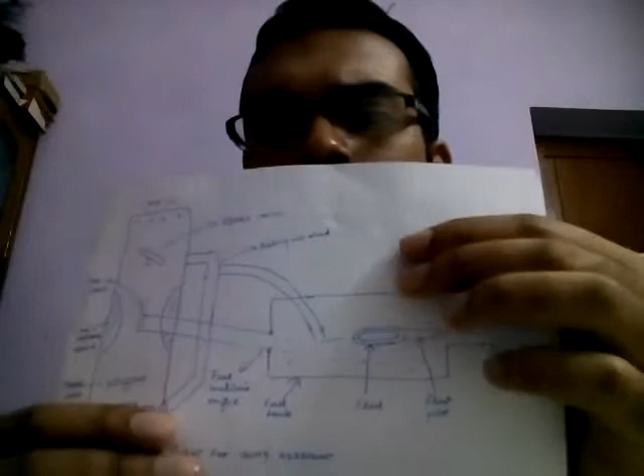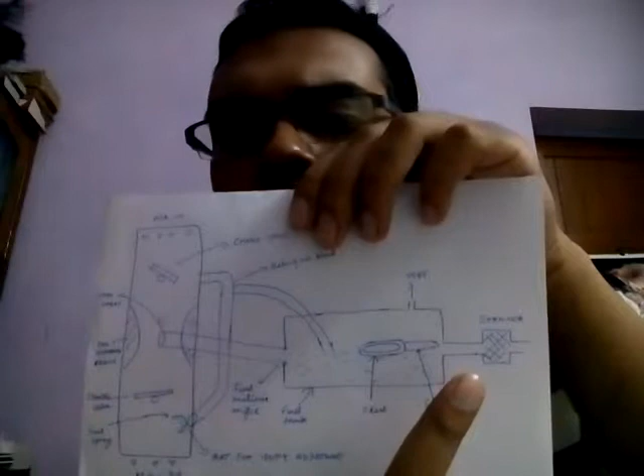Now I will give you a brief description of a simple carburetor system which is used inside the automobile, or you can say any IC engine. This is a simple carburetor. This is known as the bath, where the fuel is collected from the fuel tank, which is a part of the automobile. This is a strainer through which the fuel is passed, so that impurities are separated and pure fuel is able to collect here.

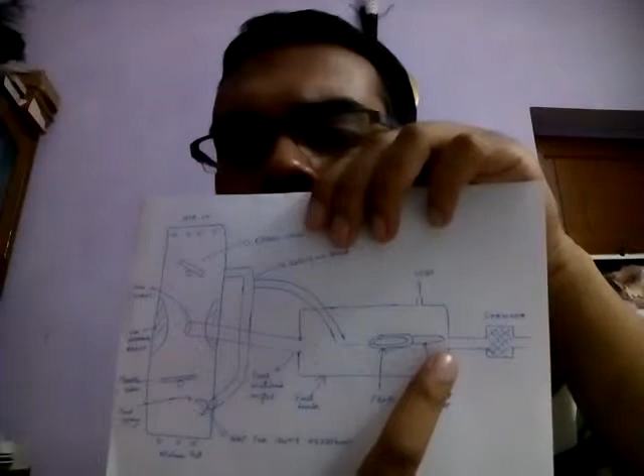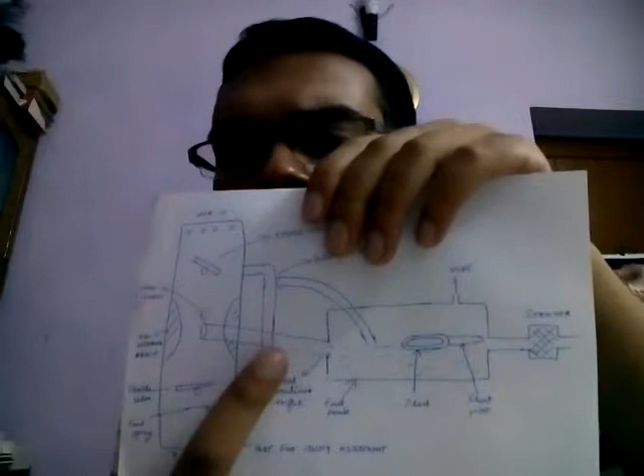This is a needle valve which regulates the amount of fuel inside the fuel bath. When it comes down, the entry of fuel is allowed, and fuel enters into this bath. And once it goes up, it closes down the valve, and the fuel entry is closed. This is known as the duct. Through this, the fuel is being sprayed into the passage of air which is created in this part of the system. Here the air enters, and here air moves into the engine cylinder.

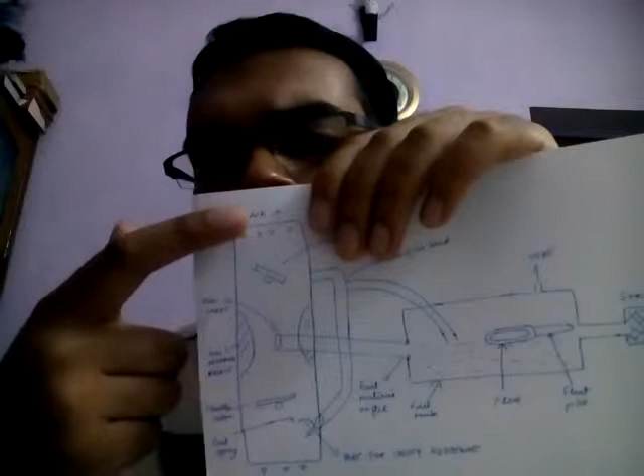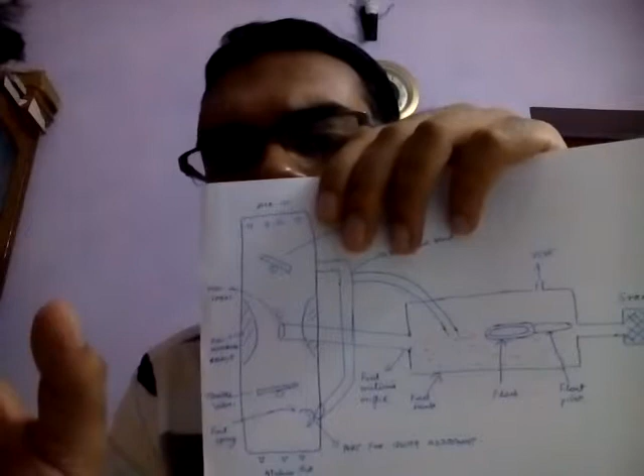In this passage, there is a part which is known as venturi. Due to this venturi, the pressure differential is created. How is this created? This is a part of Bernoulli's theorem, which says that if the area of the cross section of the passage is decreased, the velocity increases, and ultimately it decreases the pressure. As a result, here it is the atmospheric pressure, there is a decreased pressure, due to which the fuel flows and is sprayed into the air and mixes with it.

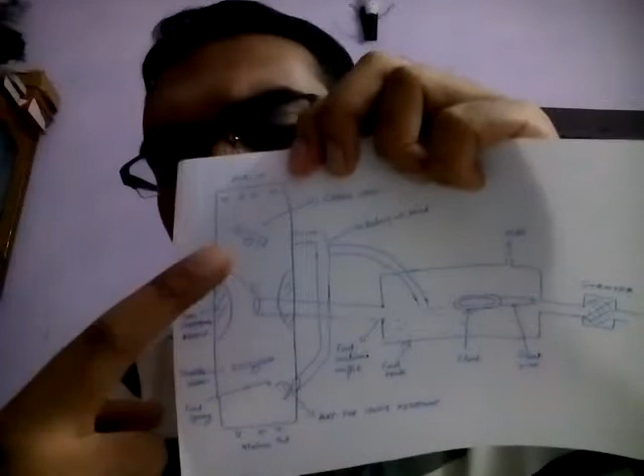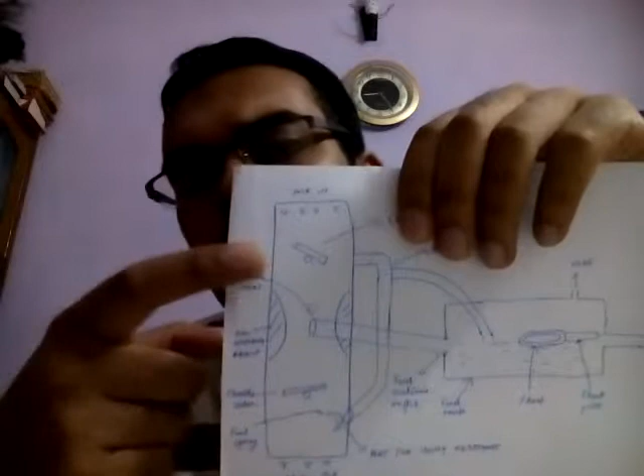This is known as choke valve, which regulates the entry of the air. This is known as throttle valve, which regulates the exit of the air. These two valves are opened fully when the load is very high, and closed when the load is very less. This is the process through which the air and fuel are mixed and fed into the engine cylinder.

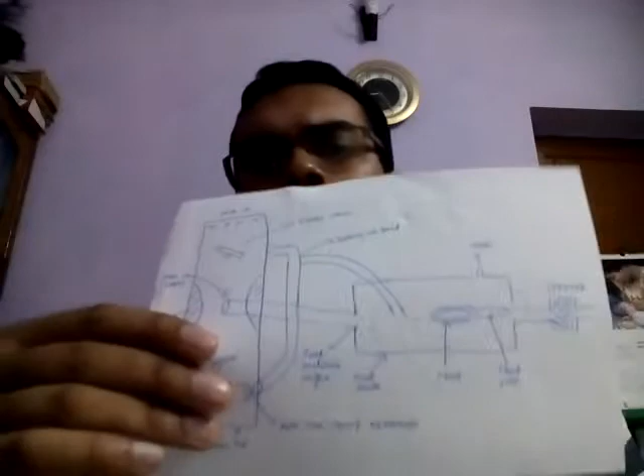Now, this is a very simple process, but ultimately what we require is much more than this process. So some compensating systems are also provided in carburation, which include the air bleed jet, which provides additional air, then the compensating jet, and the emulsion tube. Others are the back suction control mechanism, auxiliary air valve, auxiliary air port, and needle type altitude compensation device. These devices enhance the carburetor functioning and improve the efficiency of the engine.